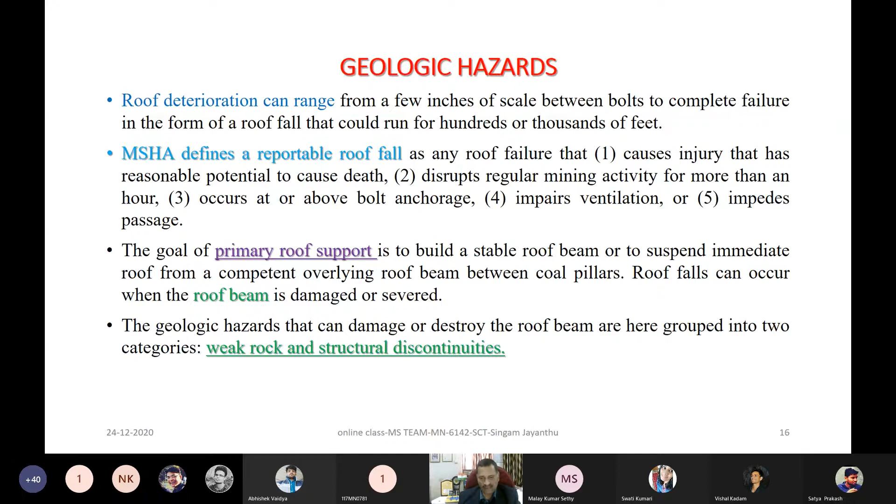This gives a simple picture from some books and all - later I will show what we have done. But some information should be there with our beloved students, that's why I kept a few things here and there. Otherwise I don't encourage showing what is already written in books 10, 20, 30, 40 years back, because those things you can see anytime whenever you get out of your busy schedule of helping your parents or studying something else.

From the surface, especially for those who haven't entered the mine physically - though everybody in this group has entered along with me into the mine and is well aware of it virtually - if this is the surface, there can be some slips in the formation. Suppose this is a coal seam, and then there can be faults. Majority here are experts in understanding what a fault is, but just for the information of our beloved students who are not mining engineers, it becomes my duty to make this a little easier to understand.

Suppose there is a seam like this. When there is a seam, consider this is something like a fault. This may be your coal seam, as shown in these thesis diagrams. Now if this is displaced, something has gone up vertically, or along some plane as shown in the section. That may happen, or it may be thrown down - a down-throw fault, up-throw fault, and so on. This dislocation is very simple to understand, my beloved students.

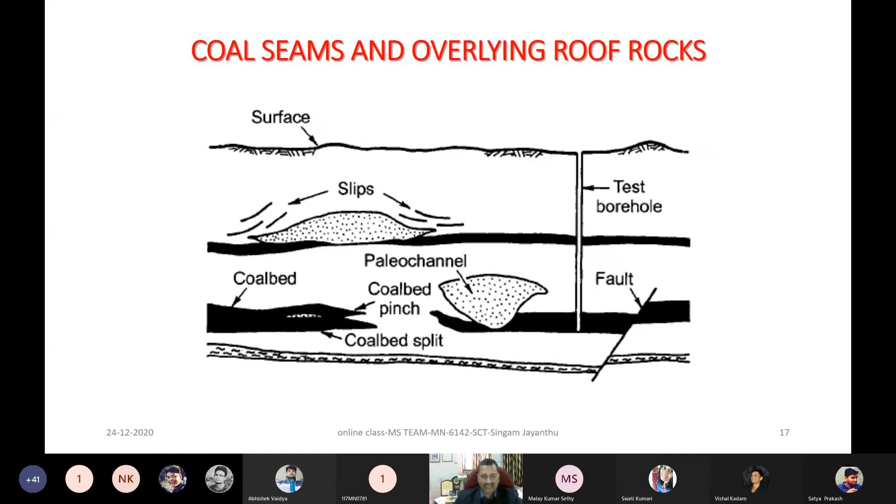Now to go further, some more from the book or from paper, I am keeping it here. So this can be a cutter roof failure where the shale cutter, there are different types of formations. Okay, later I will be showing you our own mines.

Already I told you, right, that but at the same time I should also give you, I should also introduce to you something which is there in the books, so that when you open the book and see, that also should be known to you whenever there is some proceedings, then it is there already, I have seen somewhere, right? That's why I'm showing a little bit one to here and there from the books or from some international, national conference proceedings or course materials also.

Now, I am sure some of my students here who read before underground miners or some other part of it, already some course materials also I sent to them, and at least they can respond to me in between later how many have some course materials on strata control with them, so that they can share with others, right?

So here this cutter roof means what happens, suppose this is the immediate roof, right? This is a gallery like this. Gallery is here and this is the roof. So we'll find depending on the horizontal stresses when there are more, right? So sometimes in between there is something like a cutting. That's also called guttering or cutter roof failures.

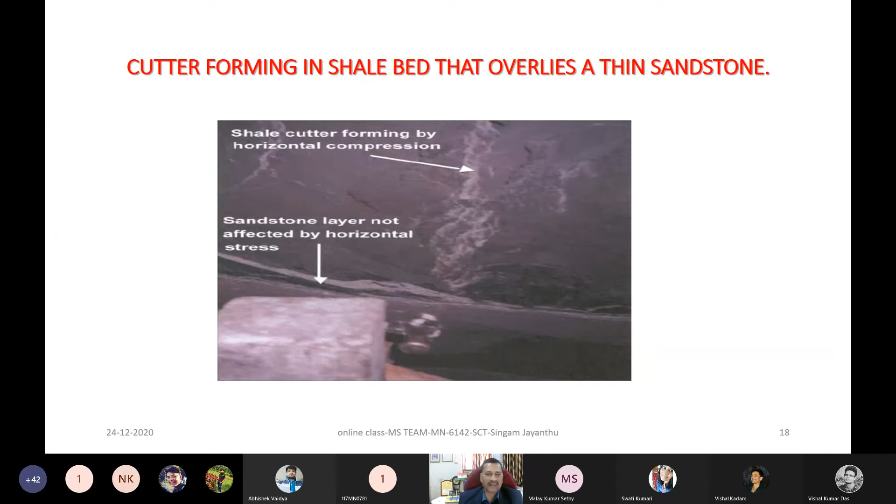Now, this is again a simple way to show, from the book, from many publications also, you can see here how roof separation is happening when there are beds. The stackrock and all, different terminology is used; for our purpose, very simple to understand. There are different bedding planes, whether it is shale, coal, in between carbonaceous shale, sandstone, fine grained, medium grain, coarse grain, whatever the name. You can give it that way.

Then, when there is some opening, you may also note it down, especially those who are non-mining engineers in our strata control technology class. I used to promote and encourage this transdisciplinary research by groups other than mining engineers since my joining here as a professor in 2006. That's how NIT Rourkela has been the first in introducing these transdisciplinary groups in India as far as mining is concerned, a great privilege for everybody.

So now here, bedding planes, faults, there can be so many ways. You can see here, bedding plane, this fault is there. But ultimately when this happens, what is happening here? Whatever bolting you have done, try to understand this figure nicely, because the same thing I will be showing in a mine, how it happened. Now when there are beds and some bolt is showing like this after a fall, that means at this place the anchorage is not proper. Otherwise, this should have simply tried to suspend the material below.

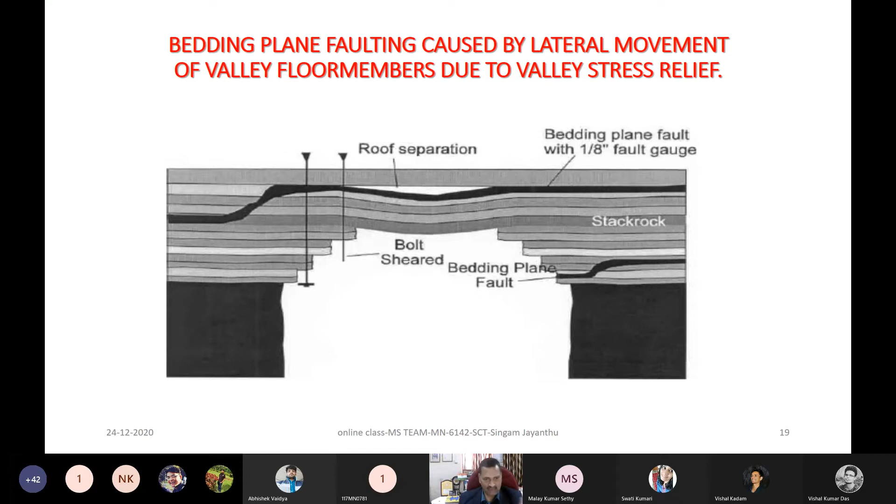So it can be because of these geological problems; the factors responsible for strata control problems are discontinuities. Even a rock may be very strong, but there may be some disturbances, the bedding planes or some type of joints, dislodged joints, or a joint filled with some other material between two rocks. Otherwise, it is open joints. These discontinuities may even be major faults. And in that case, we use artificial supports, so that we try to suspend and make it like a clamped beam. This is what I tried to show you here.

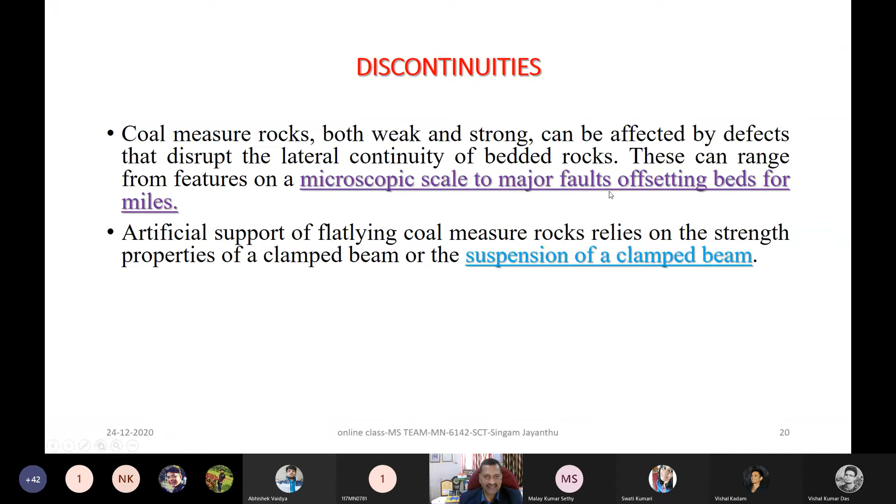And then there can be clay veins. Why am I giving the word clay vein? Please note down. There are some typical mines where there is some clay, and I don't know whether you could understand when I showed you some examples of photographs. Especially note down the RK1A mine. There is about 70 centimeters along the floor. Along the floor means above the floor level, around 1 meter above, 70 centimeters of clay is there.

So now you can understand the magnitude of that, how it will lead to a lot of problems. When it is there in the floor, this may lead to even floor heaving conditions, or if it is on the sides, side failures. Sometimes if it is dry, you are fortunate, God is great for you, or Mother Earth. Otherwise, if there is some seepage of water or watery conditions, that clay, when it is wet, swells. Then that causes a lot of other strata control problems.

So these clay veins are very typical issues, and they can be injected between different beddings, like between sandstone and coal, or in the sandstone maybe carbonaceous shale, and so on. And there can be clay-filled tension features and many things we observed when there were roof falls and accidents, when we used to do these types of investigations in disaster situations and tried to give strata control measures. If this clay is there, as I told you, roof damage can be very severe.

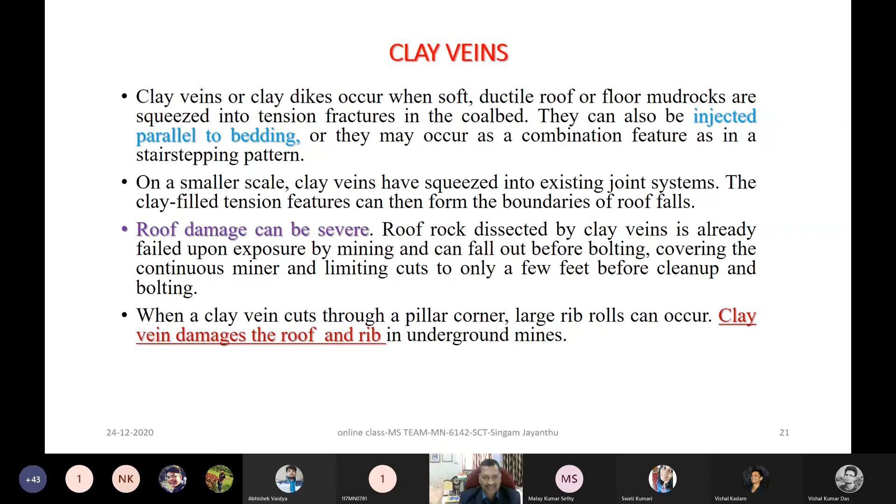Then, in addition to that, there is Rajur colliery. Note down Rajur, R-A-J-U-R, in Western Coalfields. Long back, as a scientist of CSIR, maybe 20 or 30 years back, we were working with a team led by Dr. T.N. Singh Saab, with whom I was there for 10 years. Why I am telling that is, whatever is in his book was part of the work done by us as a group. We were fortunate to be with him, providing all that information from the field as scientists.

So in that mine, even when we were trying to adopt cable bolting, even experimental studies to implement it, we failed. Why am I telling that? Note this down. We failed. When I say I failed, that means there are some reasons beyond the scientific sense which you cannot solve. Because of such strata control problems, sometimes you may have to close down the mine. That also happened, for example at Hemachandrapuram mine of Singareni Collieries. There are many such examples. And one more in Central Saunda Colliery in CCL.

In CCL in 1989-90 we tried to implement it, and because of the water, I still remember that experiment with hardcrete and quick-setting cable bolting like what you are seeing here, my beloved students. That's why I'm showing you where clay veins or other materials are there and there is water seepage. There our Jagannath Shukla, our technical assistant, got problems because of the material we were injecting into the cables, in the initial days when we were doing this as a strata control measure for thick seam mining.

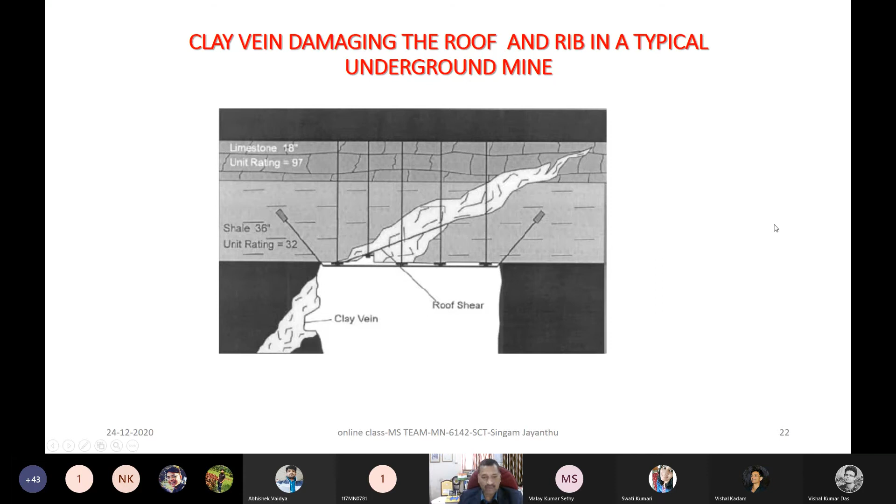The logic is very simple. You cannot have more than that height, right? And now even cables also you can have for reinforcing, right? This is the way how you go further. But here similarly there can be some faults, right? And for that you have to ultimately understand the total rock mass.

Already I explained about the fault to my new students who don't know about mining, but others already know. I should not again and again repeat those things; that may be boring for my beloved students who are experts already in these faults. Finding faults in others or finding fault in our own self, and giving some good suggestion, leads to excellence in future for you and others, right?

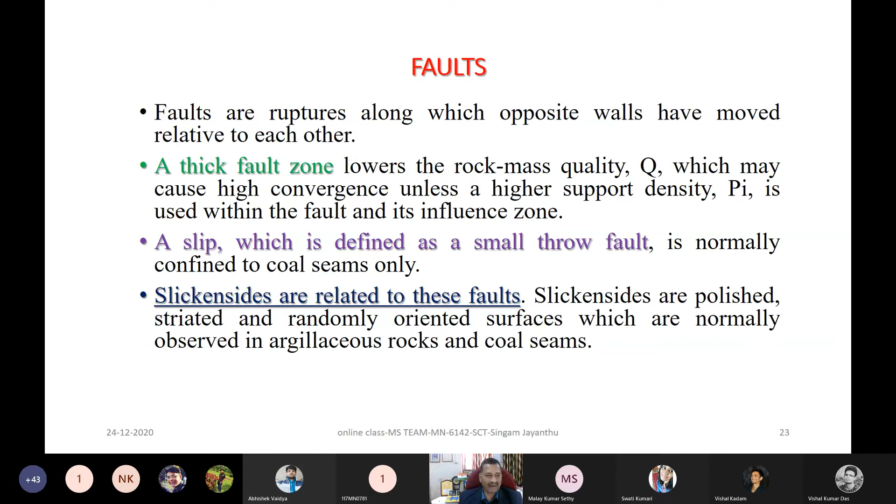So slickensides are also there, right? And all these things, and bedding planes you understood already. When there are so many beds of different thickness, different types of materials, different in-between filling materials, no filling materials, right? So many things will be there. All these things will cause a lot of problems, right? And that's why I kept it, my beloved students, which you note down, underline, red color, maroon color, whatever you have, right? With underline and bold, right?

Italics, right? Roof truss. I need some Arjun to come forward in the next generations, especially to deal with strata control problems in India, if not in the world. In the world, other places, people like, at that time, Dr. Chris Mark and Wagner were trying to do something for Utah mines, Pennsylvania mines, for which we have a lot of case studies, right? So now this is very much required to deal with such situations.

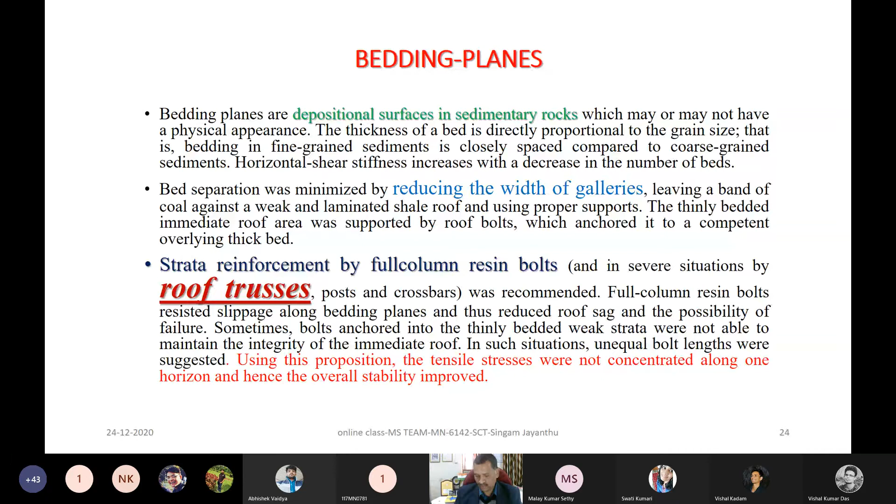And joints you understood, I need not explain much, but the stress relief issue I will be discussing later. I want to show you, instead of continuing with the simple theory, there can be joint ruptures with no visible relative movement, or jointed rock masses in three dimensions. When there are joints, 2 sets, 3 sets, 4 sets, then depending on that, it will become like blocks, right? That's what happens when we are using a model, right? Numerical models, discontinuum models or UDEC models, 3DEC models, and so many things we'd like to utilize, of course, with different types of limitations.

Then the cavability of these blocks also depends on their size and all. If that block is very big, suppose this is a block size, right? And my gallery is only of this much width. This is the width of the gallery, but my block is bigger than that. Then it is not causing any problem for us as far as caving or that working is concerned. So that way you should understand. And there can be stress relief.

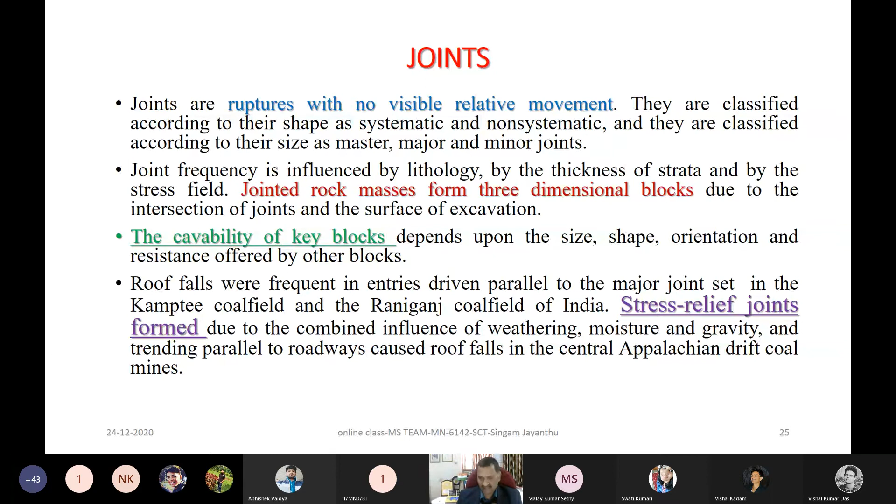And now another CEP question, because to some students already I tried to explain in the previous courses. Now CEP question 2 is, what is stress relief? Somebody can explain, right? Now going further, this is the way these roof fall accidents may happen. These joints, when they are joined together, there may be a fall at those places because there is more span exposed, and even a civil engineer or mechanical engineer can understand by following, right?

I used to tell, right, sometimes, May I Follow You, Elizabeth Rani, right? So our civil engineers and mechanical engineers, including our rock mechanics engineers, follow Elizabeth Rani. Elizabeth Rani is not Elizabeth of London or UK. It is E by R. That is Young's modulus and radius of curvature. E is Elizabeth, R is Rani, right? M by I is equal to F by Y is equal to E by R. May I follow you, Elizabeth Rani. That solves a lot of rock mechanics and solid mechanics problems. Need not discuss much on that.

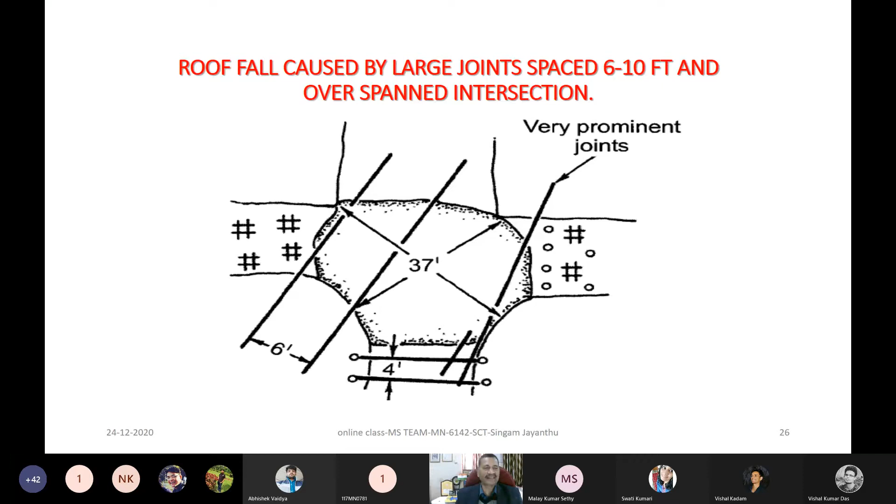So now before continuing further, I'd like to take up your answers for this question, CEPs, and then any doubts. And later I will take you once again to underground mines and dealing with these problems. Now, my beloved students, you can unmute, and if there are any queries, ask me.

So this credit goes to our Kottakonda Maharshi. He is here, my beloved students. He is doing MTech research on this topic of strata control, and he is a COVID warrior, right? So a vehicle was sent to his doorstep, in another district, and then brought him back home, after taking all COVID-19 precautions by our esteemed mine management. That is the way our beloved students are treated when they are very sincere in understanding the subject and have the interest and enthusiasm to conduct more research and contribute more to our mining industries.

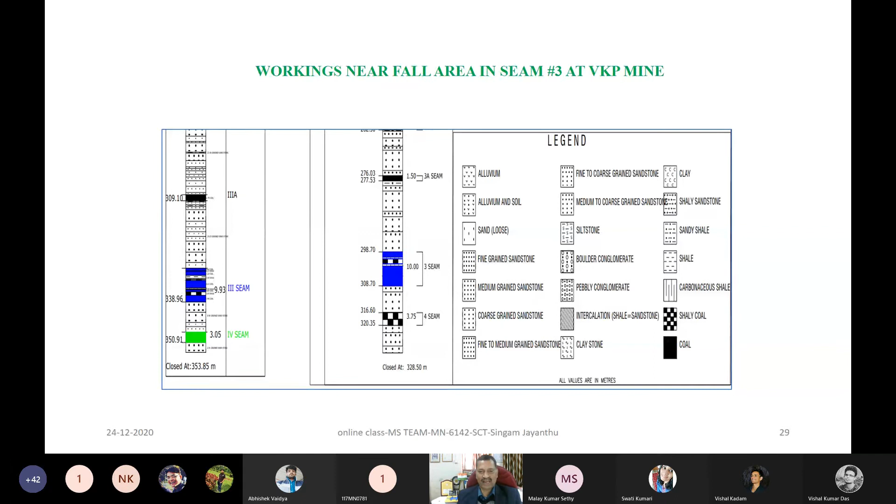So now, this is the strata you see, my beloved students. I'm making it a little bigger so that these are the sections. Whatever I showed you as part of our subject, now you see a section, how it looks like as a 3 seam and, overlying that, the different types of rocks and rock masses, right? Especially there is alluvium on the surface, right? Alluvium and soil, sand. Those who don't know about mining, please note this down.

Even fine-grained sandstone, for those people only, because I know more than 50% of my beloved students have been very sincere since they have been associated with NIT Rourkela and with us for a long time. They know the punctuality, discipline, and the value of time and knowledge. They know about it. But others, those who don't know, note down. These are different types of rock masses, right?

Coarse grained sandstone, fine to medium grained sandstone, and even these students also can note down, my beloved students. Nitesh, Prabhu, Swati, all those things you can also note down, because in this mine, these are the typical rock mass consists of this type of rock, right? Or the beds or bedding planes, fine to medium grain, siltstone, boulder conglomerate, pebbly conglomerate, intercalation of shale sandstone, claystone. I think you must be seeing here claystone, coal, of course, shaly coal, carbonaceous shale, and only shale, sandy shale, shaly sandstone, and you can see a lot of differences, right? Sandy shale and shaly sandstone, right?

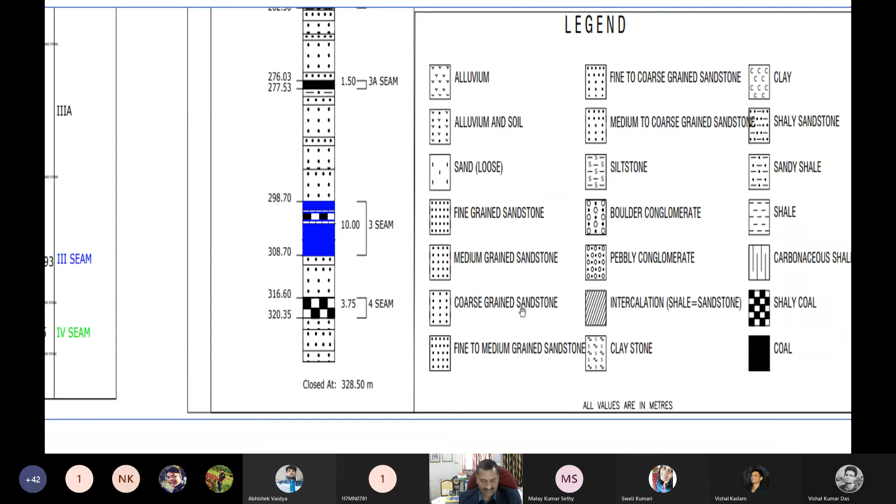And here, similarly, now you can see some more. I am taking you to this type of rock masses. Why am I showing this to you now? This type of rock masses are there, and you are supposed to understand. And this is the place where that accident took place. And here I am making it a little bit bigger for the benefit of you, my beloved students. And you can see now the geological disturbances here. That's what I would like to highlight for you, my beloved students.

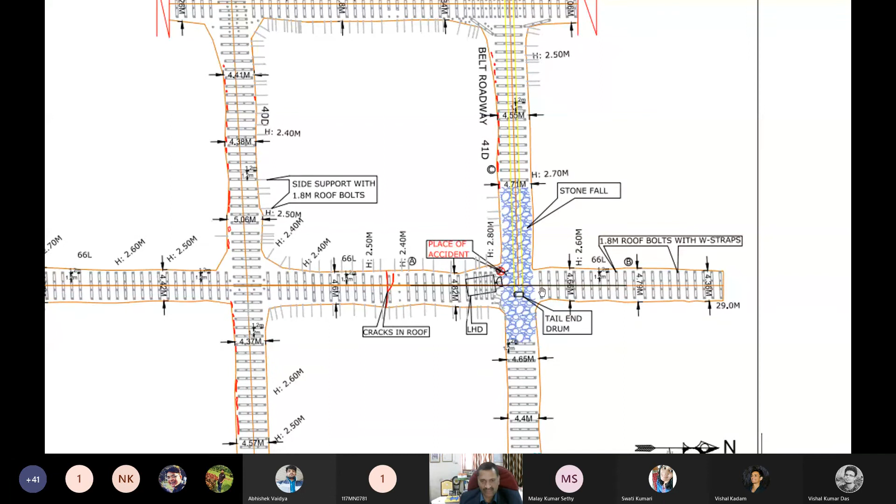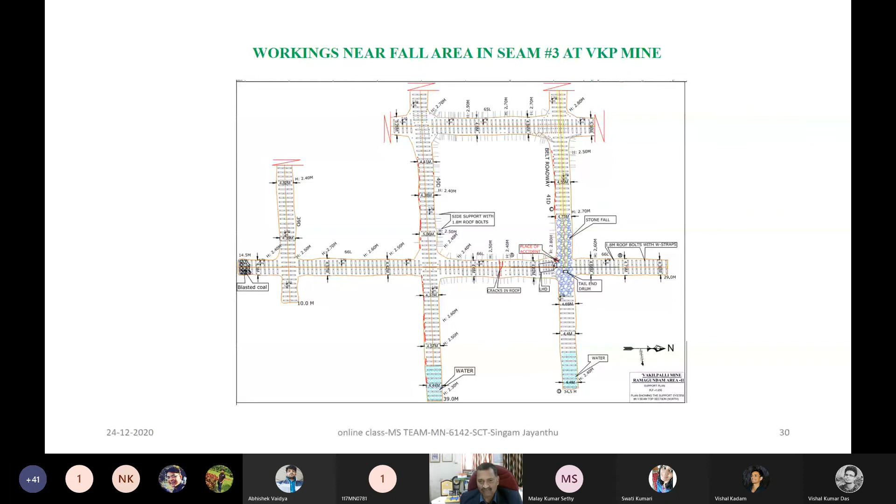Now cracks in the roof like this here, and this is where at the junction the fall took place, even extended the stone fall up to around 20 meters, and then this is the place of that accident where we lost our beloved Naveen, who was an overman at that mine. And then going further, of course, we can see so many things later also, depending on your interest. I'm showing you the total mine and its boundary, right? And then this is the place of that accident which took place. And then there are underlying, overlying seams where Longwall was worked in the above seams. And we are working under the goaf of the Longwall mine. These are all the issues of multiple seams we are supposed to understand.

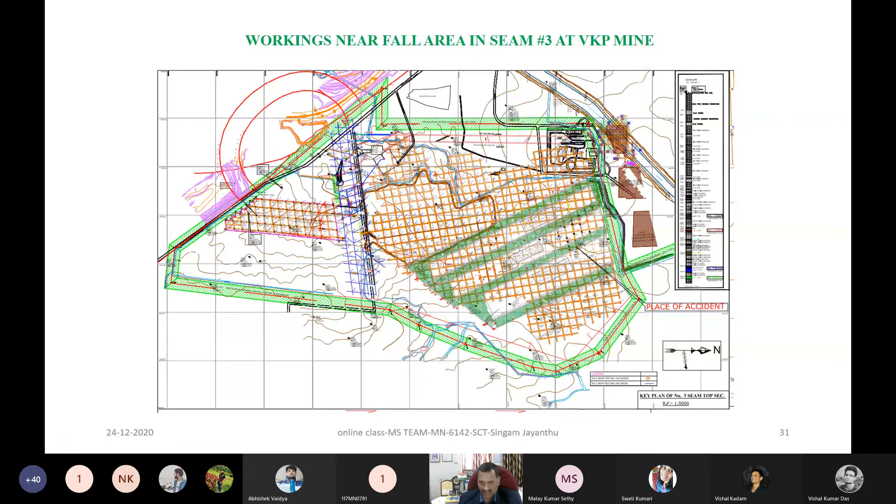And this shows the faults, my beloved students. You see, these are the faults of that place, in that this is the place of accident, what I am showing to you. And here, these are the faults striking in this direction. And then this is the throw, it is already written, 1 meter, 2 meter, whatever, right? So these are the issues of geological disturbances causing this type of roof falls. And this is that roof fall, my beloved students.

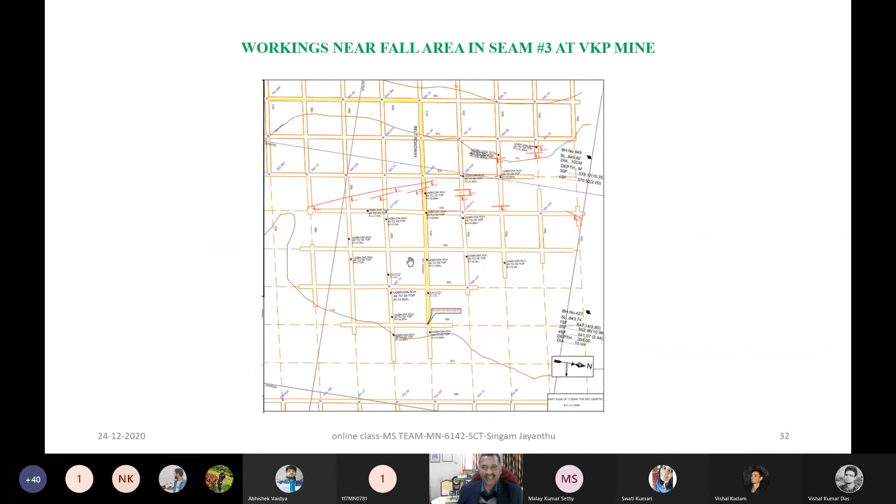I wish you should understand in detail, and then what best we can do with our knowledge, with our BTech, MTech, PhD degrees, how much you can contribute to the mining industry and to our indigenous Make in India, Atmanirbhar Bharat, for our mines. There comes the issue, right? Now take it as a challenge, to become the best strata control engineers in India, if not in the world, right? At least by seeing this type of issues which happen. So this is the way how it happened, and now you should design, you should utilize your knowledge so that this should not happen at least the next time, right?

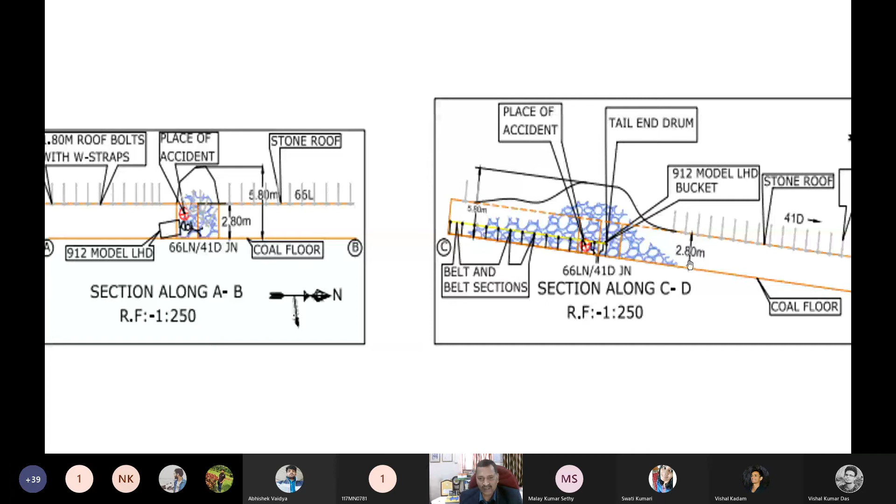So this is the way where 66 level north, 41 deep, and this is how it was extended, right? Although there are support systems and all, and I am going a little bit more, my beloved students. Here, these are the sections CD, AB, whatever, and this is what I am giving you. It is not a hypothetical case, my beloved students. This is made on 30th October, a one month back story. It is certified that this plan is correct. Every information is 100% correct. What happened, I told you, I need not show this to you.

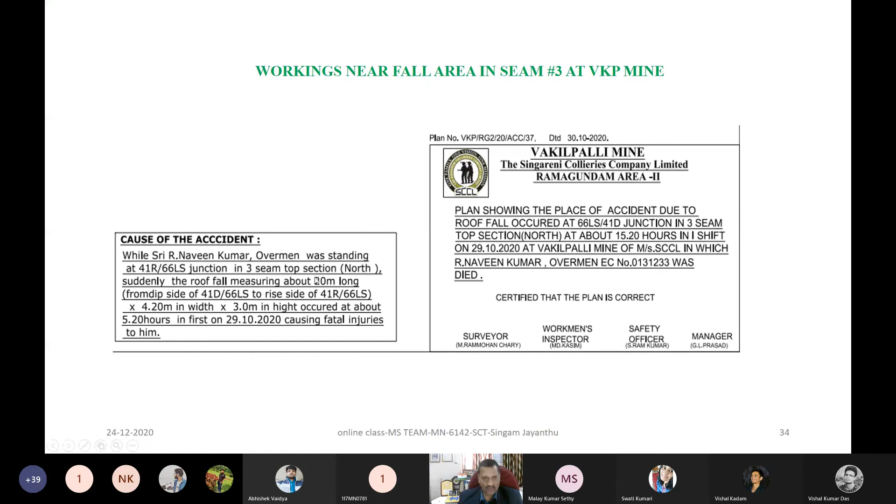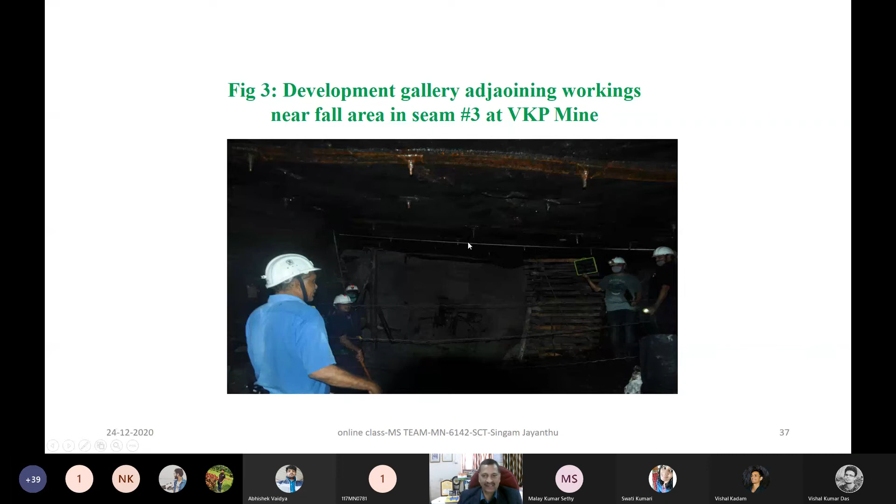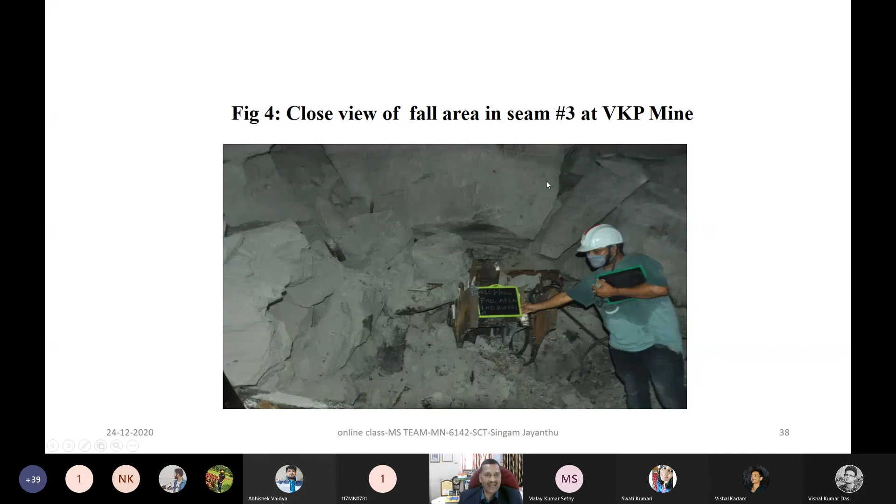Now the close view, you can see how this rock mass looks like, and this is the details of that mine I already explained to you. This is the information that is supposed to be collected as a checklist.

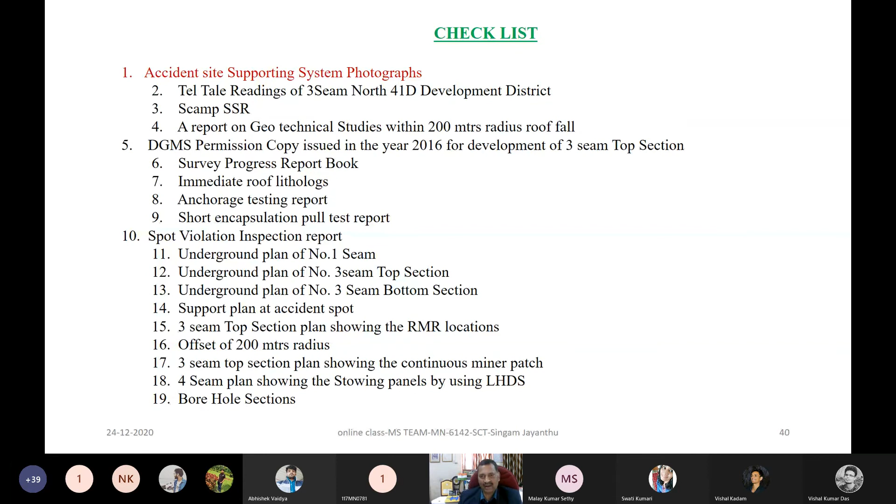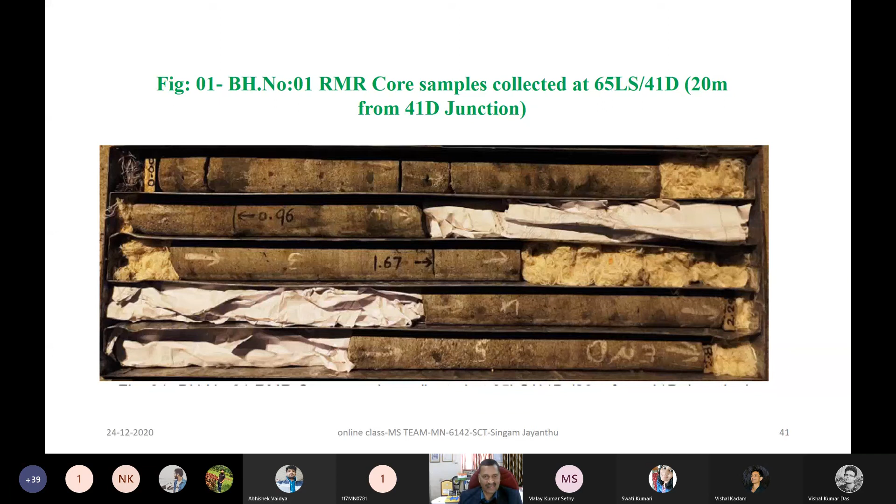Now this is the borehole made, and the rock mass, as you can see here, at that 65 level south of 41 dip. This is just 20 meters from that junction where that strata control problem took place, about which we are discussing, my beloved students. So this is about that mine.

I don't want to spend time on this. Of course, depending on your interest, we can discuss structural features and all those things, how it is explained, and this may become repetition for my students, but I wish that those who are not mining by BTech and joined MTech should put some more effort to understand these things. If there are any doubts, we will discuss. I take it as a privilege to explain more and more times so that you will become the best transdisciplinary, translational, industry-oriented research and academic group. You will belong to us.

So this is the way how we divide. We do the rock mass classifications with structural features. That's why I am showing you this slide, my beloved students, and I will try to explain for 2-3 minutes before summarizing and taking up your CEP questions.

Here, these are slips with throw of 0.1 to 2.5 meter present in that place, and joints with 2 to 5 millimeter opening were mapped. Some of my students, PhD scholars and investigators as scientists are doing this in Orient mines also, KTK5 mine, GDK11 mine, note this down. These are the details. They are also supposed to understand how it is done. They were doing this for their own mines, for their MTech, PhD, BTech thesis.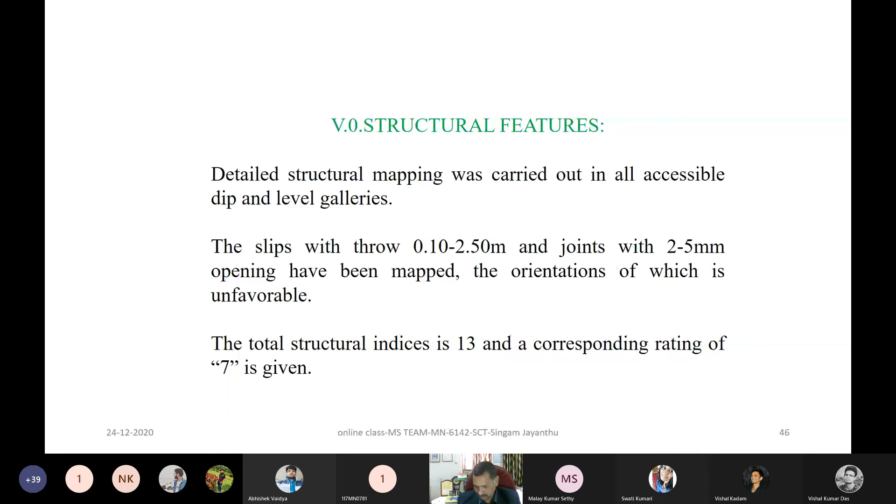So based on this, our madam Abhishek, Rishabh, Maharshi and others doing PhD, like our Deepak and other people - we know maybe open cast or underground mines, we have to classify the rock for the purpose of designing control measures, whether it is open cast or underground. This is the way the structural indices are given as 13, corresponding to the rating. This rating can be anything - it can be a slope mass rating for our Sridhar, who is doing wonderful work involving projects at present in NTPC mines, in Southeastern Coalfield, Jagannathpur Colliery, or in Rajmahal mines, Eastern Coalfield. So these are the structural features.

Of course, laboratory studies are to be conducted, and seepage of groundwater - this was done basically during the COVID-19 period by Orient Mines. Our Abhilash, who is a strata control engineer, and your general manager Mr. Tripathi, our alumnus of the 1984 batch, is a general manager. They are striving hard to provide all that information for their mines. Abhilash is also doing this along with our Ava madam, our Maharshi, Rishabh, and Abhishek, as part of their BTech, MTech, PhD thesis. So seepage of groundwater - at this place, at 2.85 meters, they made a hole, and the rating given is 9, as they got 5 milliliters of water seeping through that.

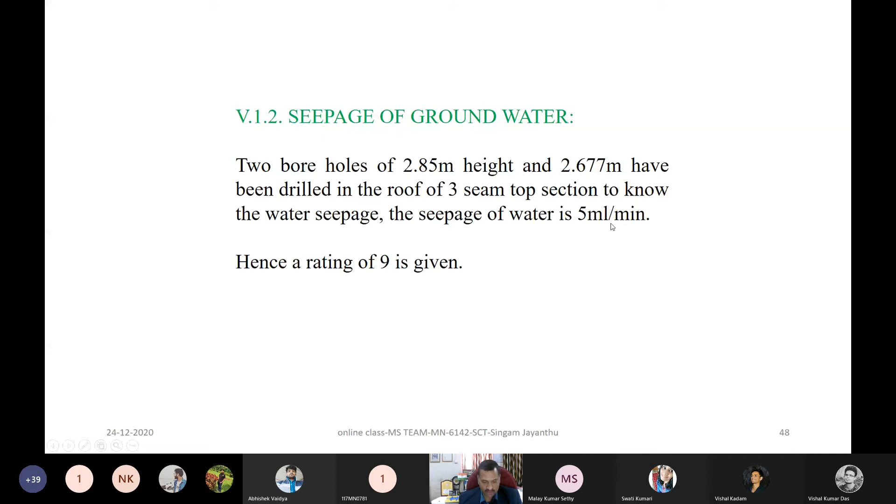And here I would like to close at this stage. These details we'll be discussing, and this type of issue will be highly useful for those who really want to become the best strata control engineers in India, and of course in the world also.

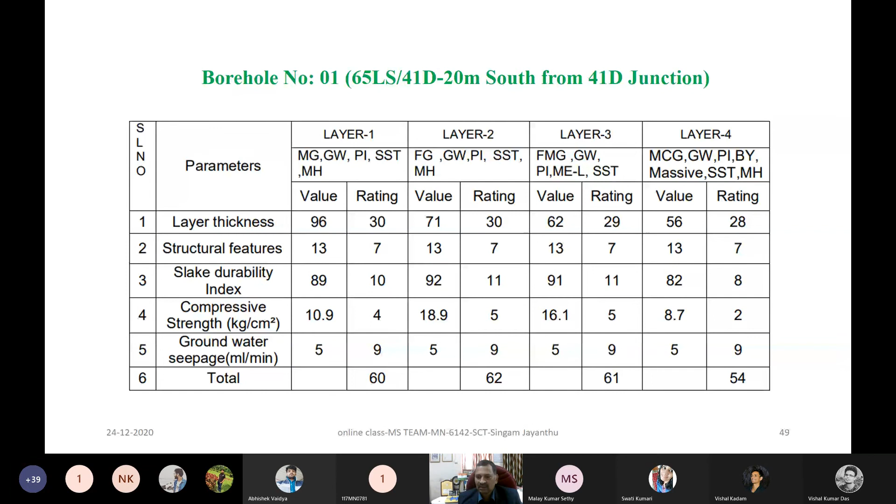Yes sir, there's no CEP answer - 0 to all. Because sir, provision is given to become CMD or CEO to some persons at some time. They should come forward, right? You should develop that habit in life.

This is not just providing information from SCI journals or somewhere else, to keep in a library and use later as a dustbin. Not like that - knowledge should be utilizable for present problems. That's where we give emphasis, and we would like to make our next generations like this.

Okay, right. Then anybody? Yes sir. If no CEP answer, now we go to the summary, Nitin. In between also if there are any doubts, people can ask, because we have 2-3 more minutes left as per my watch - this is an old mobile, but an old mobile can also show the right time, right?

Yes sir. So we started the class with the definition of roof fall, where the roof fall can range from a few inches to complete failure. We also saw the MSHA definition for roof fall, which gives 4 major criteria: injury causing death, mining stopped for hours, impaired ventilation, and impedes passage.